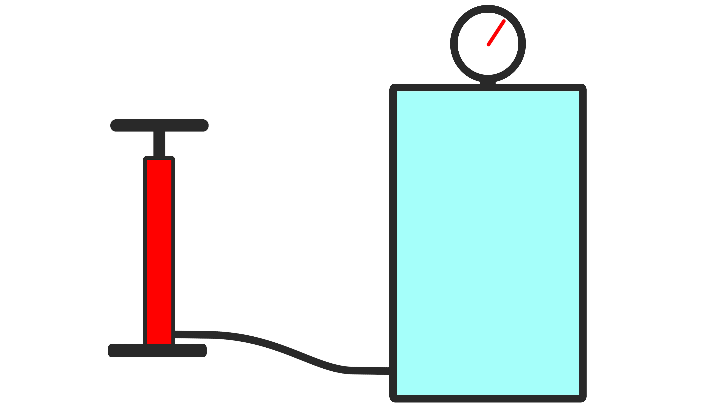Well, ignoring steam engines. Without the use of Coke and Mentos, we can increase air pressure inside of a tank using a pump to push more and more air into a fixed volume. Or we can use a fixed amount of air and reduce the volume of the tank. An easy way to shrink the volume of air in a tank is by filling the tank with water. But one small problem is the water must be at the same pressure as the air, or the air will just push it out.

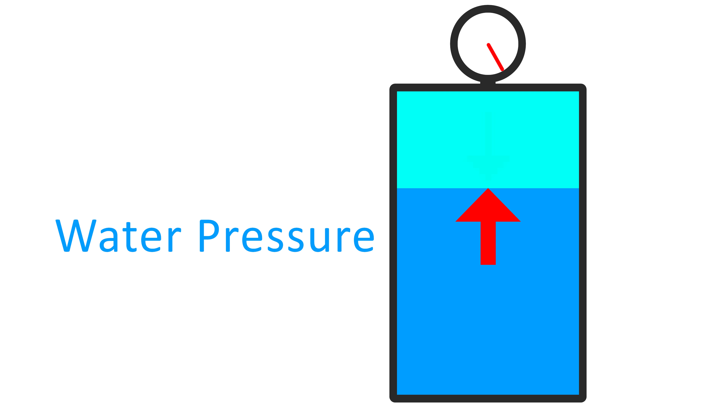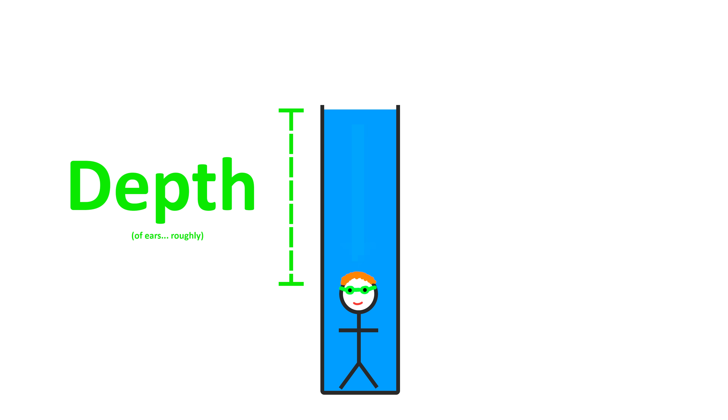However, because water is roughly 830 times denser than air, we can use this to our advantage. If you swam down to the bottom of a pool, you'll probably have felt the water pressure on your ears, and no matter how large or small the pool was, you'll feel the same pressure at the same depth. This is because the static pressure of water is only relative to the depth, and is essentially the weight of water above you pushing down. And I plan to use this to create water pressure in my tank.

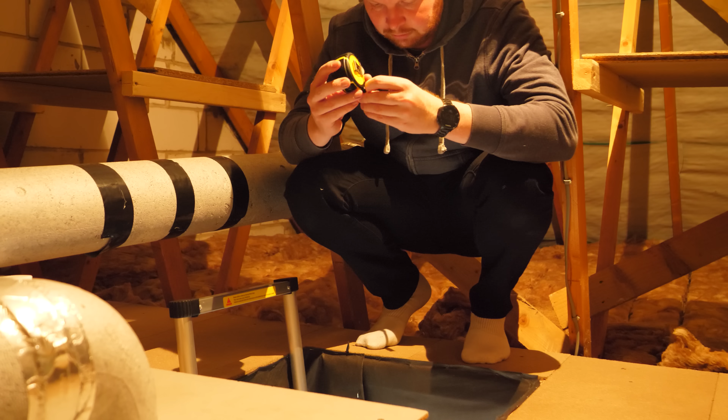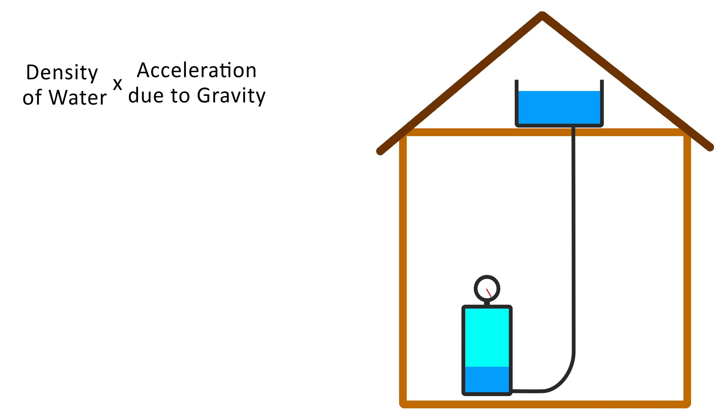The plan is to put a tank of water in the loft of my house, then run a tube downstairs to my tank full of air. The vertical distance between these tanks is about 6.14 meters, which means in theory, when I let the water flow down the pipe, the tank at the bottom should experience the pressure of being 6.14 meters underwater, which, when we calculate the density of water multiplied by the acceleration due to gravity and the depth, we should get around 0.6 bar or 8.7 psi of pressure.

Then we can use this pressurized air to hopefully spin an air-powered engine. Or is it now water-powered? So let's build this tank. I could have opted for an easy choice of using a plastic drinks bottle, as these are very cheap and easy to source, and they can hold a lot of air pressure. But I want something a bit more fancy made out of clear acrylic.

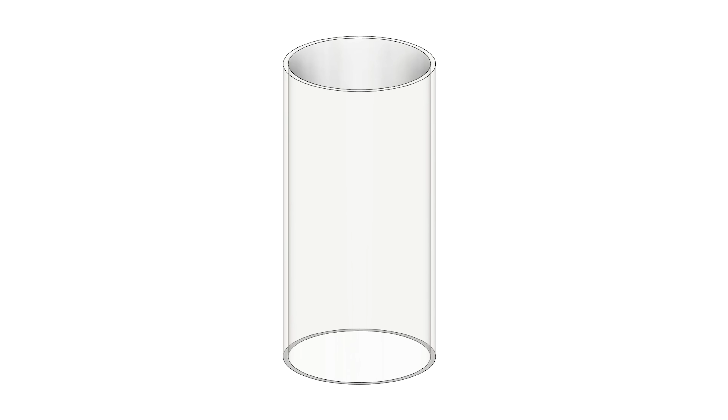But as I've never made an acrylic pressure chamber before, I need to do some calculations. For example, a 150mm acrylic tube will require 2 plates on the end to hold the air inside. And at just 0.6 bar, the force pushing out on these 2 end plates is about 1060 newtons, or equivalent to supporting a 108 kilogram weight. So I used Fusion 360 CAD software to design the acrylic pressure chamber, and I chose to use 15mm thick sheets as the end plates.

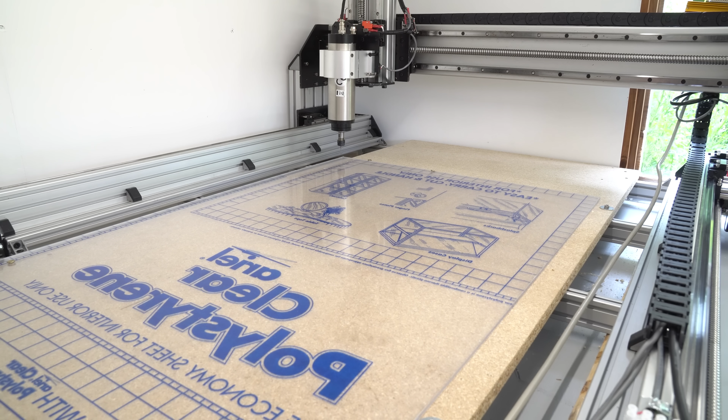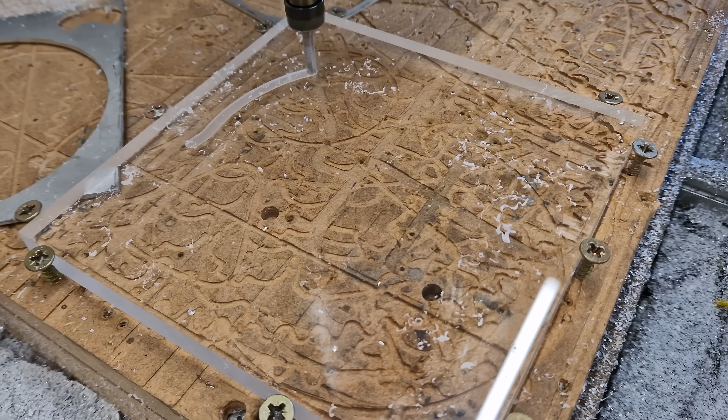After running a pressure simulation, the thick end plates were probably a bit overkill, but it allows me to cut this lip all the way round to give more surface area for gluing. I've only ever cut plastic on my CNC router once before, and it was the clear polystyrene type stuff you can buy at local stores for shed windows. And I'm not sure if it was my cutting settings or the melting temperature of the plastic, but it was a nightmare to cut. So I crossed my fingers and attempted the acrylic lid. Which, to my surprise, cut really easily.

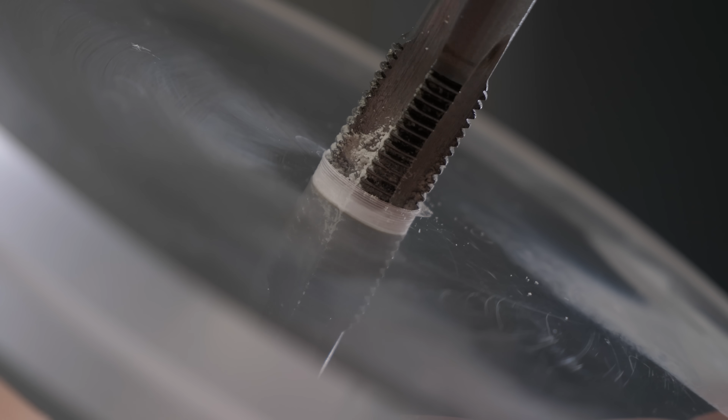Once finished, it perfectly fit inside of the tube, and it was now time to drill some holes and thread tap them for later adding some pneumatic fittings. I then sanded down the gluing area on the tube and began mixing some epoxy resin, which probably isn't the best glue option for acrylic, but it's what I had laying around and it's pretty strong. I also made sure to use plenty of it to fill all the gaps between the inner wall of the tube and the lip of the lid, which got a bit messy but worked well in the end.

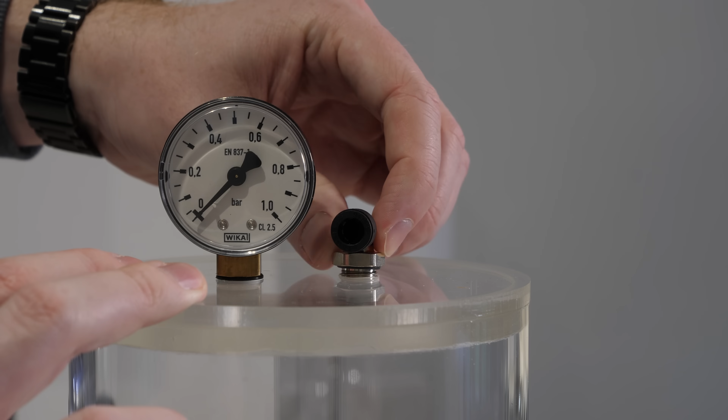Then we can fit a tube inlet on the bottom and a 3D printed stand to give enough clearance from the ground. And on the top lid I can fit a pressure gauge and another tube outlet for the air supply to the engine. The next step is to run a long tube all the way from the ground floor up 6 meters into my loft, where I'll mount the water tank.

Okay, this is the first pressure test. I've got 5 litres of water here, and the container with the tube running downstairs. I'm going to prop my phone up. The problem also is that I can't see if there's any leaks downstairs until I go downstairs. So I'm just going to have to hope that this doesn't leak. Let's start pouring.

Water's running down. Let's hope I don't just find a massive puddle downstairs.

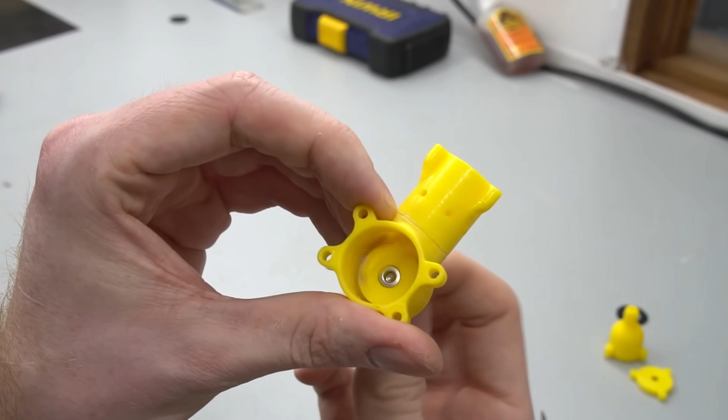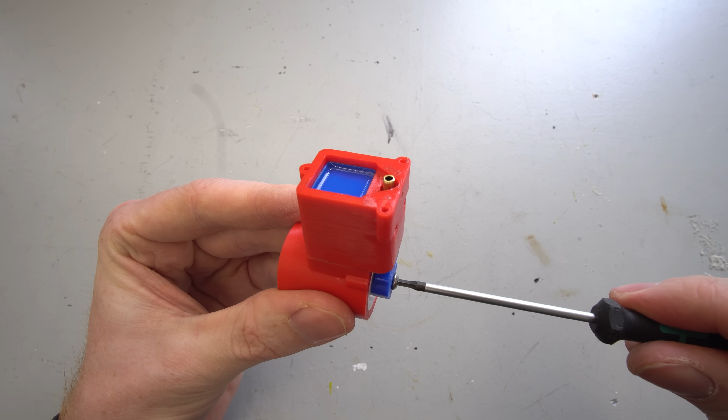Well, if you haven't seen my air-powered engine videos before, then you'll have no idea what I'm talking about. So let's have a quick recap. In November of 2017, I 3D printed my first air engine that was based off the old Air Hogs engines. And although it did run, it was extremely inefficient. So in April of 2018, I built a new engine that used a square piston and a cam and pushrod design, which was more reliable than my first engine, but still quite inefficient, as it was very difficult to seal the piston to the cylinder without lots of friction.

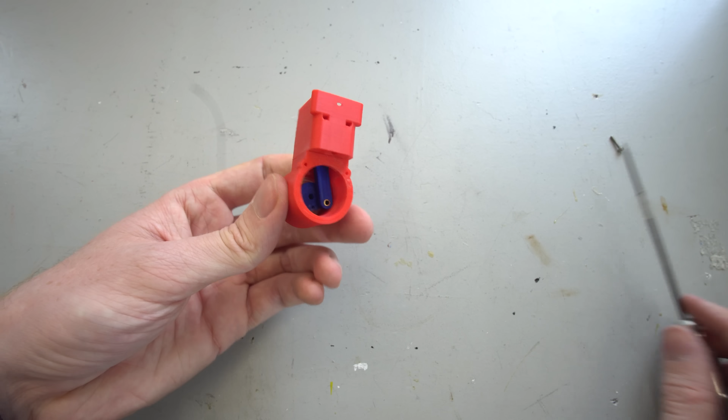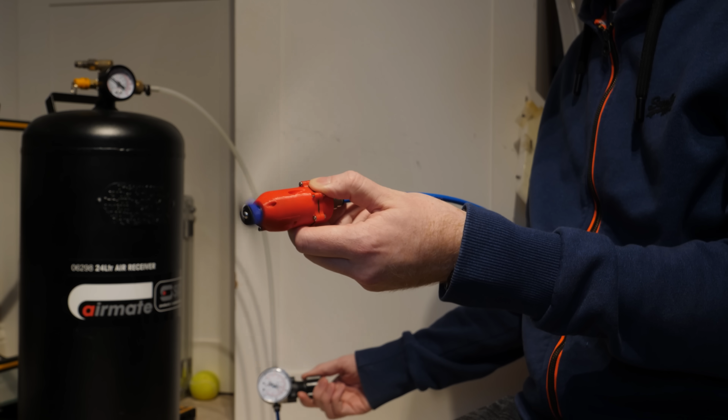Then 2.5 years later, in November of 2020, I came up with a completely new design that removed the need for an airtight piston by using a diaphragm and a new inlet valve that removed the need for any pushrod valves. And after refining the design way too many times, it outperformed the previous best air engine by a factor of 5. And could also run at pressures as low as 0.7 bar, or about 10 psi.

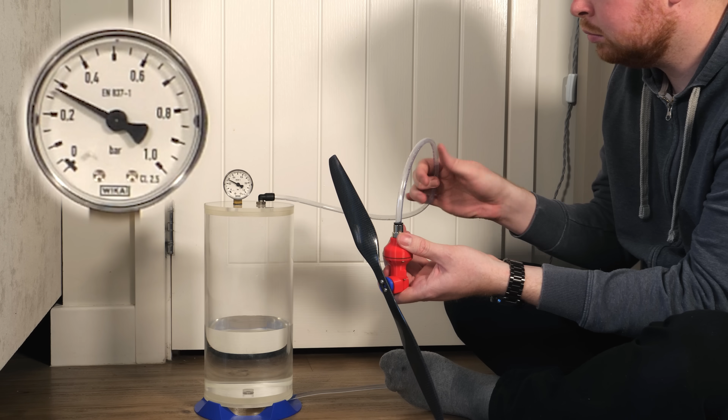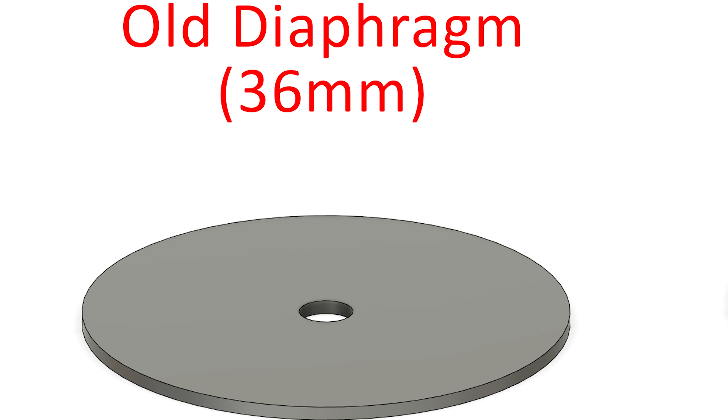But will it work with my new pressure tank? Not quite. And this reveals a problem that I hadn't previously considered. Not only do I need an engine to work at 0.6 bar, but I also need to consider the flow rate of the water into the tank. If I release all of the pressurized air, the tank takes about 1 minute and 20 seconds to fill back up to full pressure again. And it's too late to increase the diameter of the tubing, as that would require new holes to be drilled for larger fittings. So although I'd hoped that the engine would run at 0.6 bar, which is not that much lower than the 0.7 bar that it had previously worked at, in reality it needs to run at much lower pressure. So the first modification I made was to increase the diameter of the diaphragm within the engine, as this will increase the area that the air can push against, hopefully allowing lower pressures to apply more force to the piston. And to my surprise, it actually worked really well.

At least down to about 0.3 bar, when the engine would stop and I would have to wait for the pressure to build back up again.

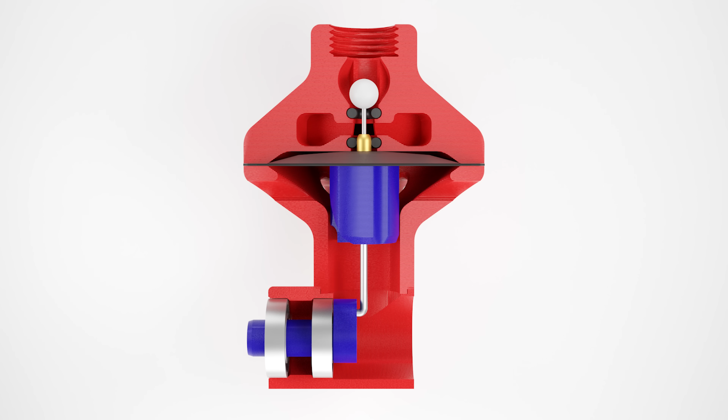The obvious next step would be to build an engine with an even larger diaphragm to run at lower pressure. But there's a small problem, because the design of the cylinder requires this cone section to allow for the diaphragm to expand, which means the piston has very little support when it reaches the top of the stroke. Making the diaphragm larger would mean increasing the unsupported distance for the piston, so the piston needs to be longer and so does the cylinder, which will probably just increase friction. Also, the crankcase and crankshaft need to be longer to avoid the propeller hitting the cylinder.

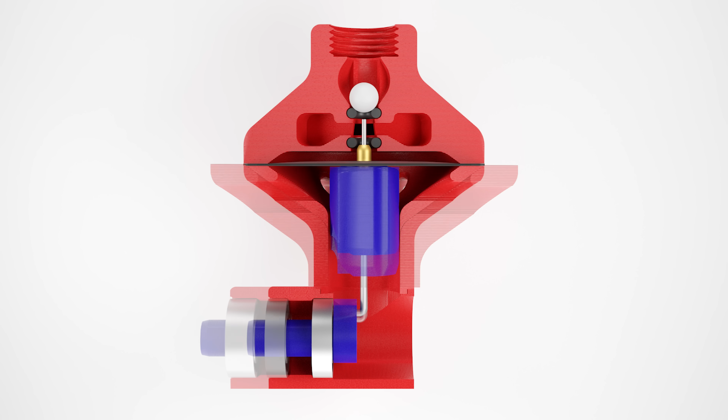So instead of completely redesigning the engine, I decided to try tweaking a few things on the current engine, the first being the ball valve that lets air into the engine.

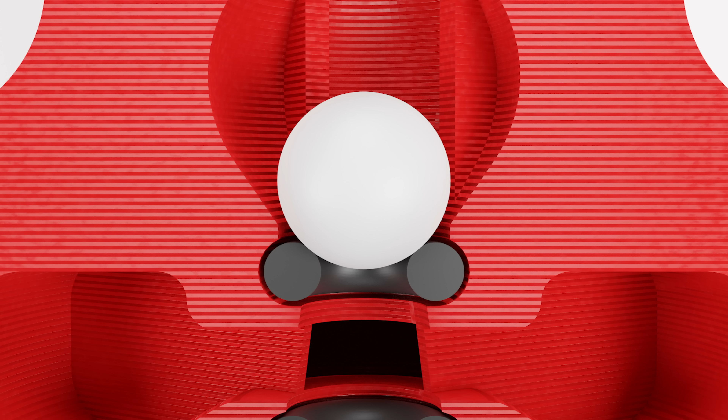When 3D printing the cylinder head, the printer often leaves small blobs of plastic as it moves to the next layer, and this means the O-ring used to seal the ball valve doesn't fit perfectly. This isn't an issue at the much higher pressures I normally run the engines at, due to the extra force pushing the O-ring into any small gaps, but at these lower pressures, if the ball doesn't perfectly sit on the O-ring, it will leak enough air to drop the pressure in the tank by almost half a bar.

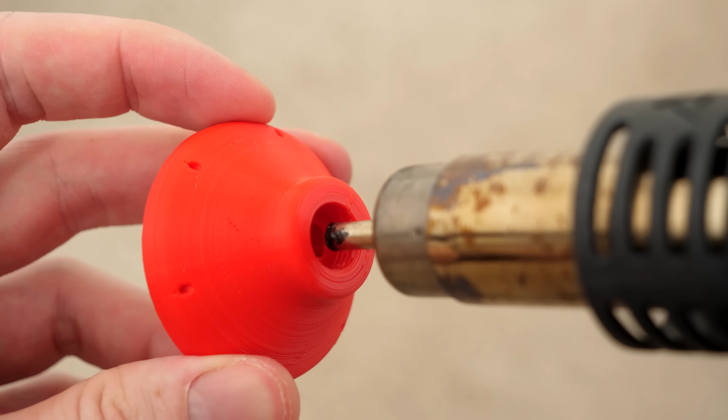To fix this, I used my soldering iron to soften the plastic inside the cylinder head, then pushed the O-ring and ball into position to mould the plastic around it, which achieved a much better seal.

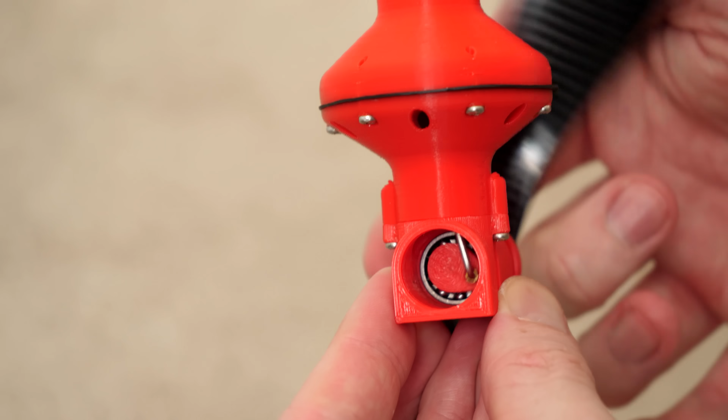I then made sure everything in the engine was running as smooth as possible, by sanding down any tight spots in the cylinder and aligning the diaphragm as best as I could, and the engine now sounds much smoother.

But it's spinning way faster than it needs to be and running out of air.

So I took the piston out and shortened the small pin that opens the inlet valve, which will hopefully reduce the amount of air that enters the engine per rotation, almost like lowering the throttle.

This reduced the pressure at a much slower rate, and the tank started to hold a constant pressure at just over 0.4 bar, which made me incredibly excited.

No! Don't stop! I thought we had a continuously running one then.

So I emptied the tank, carried the water back upstairs, and crossed my fingers for another run.

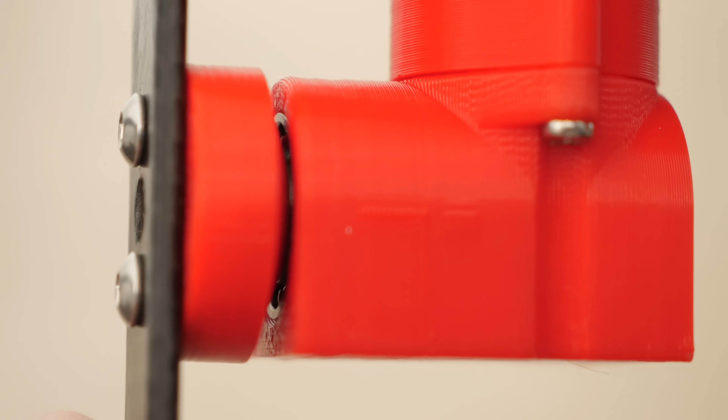I then realised that clicking noise was actually a huge amount of play in the crankshaft, which I think throws the piston off centre when it's unsupported by the cylinder.

So I removed this play with a small spacer, mounted the engine on a solid stand, and attempted another full tank run.

The engine was off to a smooth start and took around 50 seconds to stabilise the tank pressure at around 0.45 bar.

Then at about 2 minutes and 10 seconds into the run, the engine suddenly dropped in RPM as the pressure reduced.

But somehow the lower RPM allowed the tank to fill back up to pressure and the engine RPM increased again.

Then at 3 minutes and 30 seconds into the run, the engine nearly came to a complete stop multiple times before switching direction.

Which again allowed the pressure in the tank to rise.